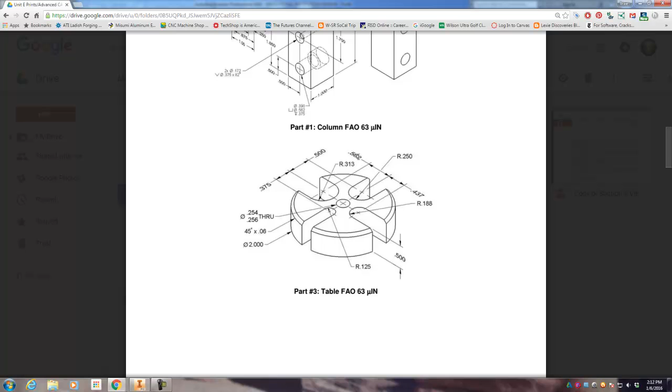So there's just a lot of dimensions. You got to really pay attention to where these lines go back to. So it's 0.375 from this line to the center of this, and then from this line to the center of this. So it's an idea of making sure that you take a minute and you look through all your dimensions as you're carrying that out to make things a little bit easier for yourself. So let's get after it here.

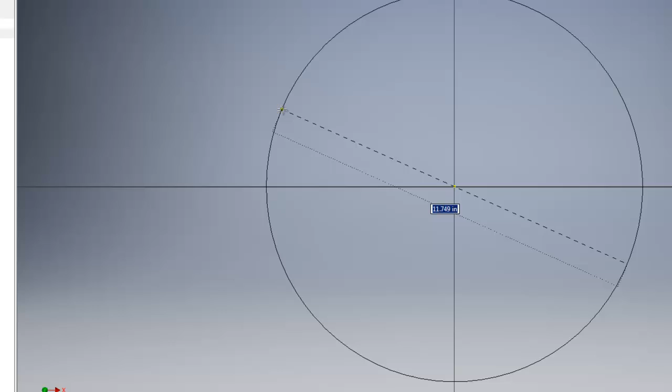So we create our new part. We start our 2D sketch, and if you look at that other piece, you can see that we'll create that on the top plane as well, like we were doing with the last one. We'll rotate that around so we can read the top, make sure life goes easy here. So we're gonna click on circle, start it from the origin, and it looks like the overall diameter of this whole piece, it says it's got a diameter symbol of 2.000. So it's a 2-inch diameter arbor press.

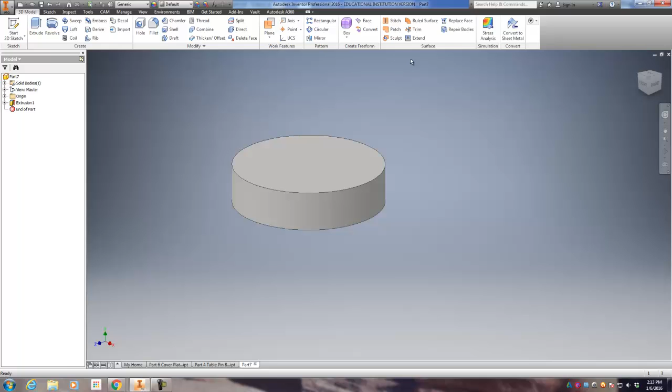So we'll take that, and we're just going to start by extruding that piece, and the thickness of the arbor press appears to be 0.5 on the print. So we'll go ahead and make that piece. We're good there. And now we'll click on this top face, and we'll create a new sketch, and this is where we're going to put all of our, again, I'm just going to rotate it because I like to, so I can read top.

But now we're going to have to put those different size slots in all of these places right here. I'm going to do it similar to that last one where I made a circle and I went from there. So let's go ahead and make a circle. Let's start with the smallest one first, which is down here. So we're going to just randomly kind of place a circle in here. The diameter, oh again, this gives me a radius, doesn't it? So if you remember, because the radius is 0.125, 0.125 times 2, it's a 1/4 inch diameter.

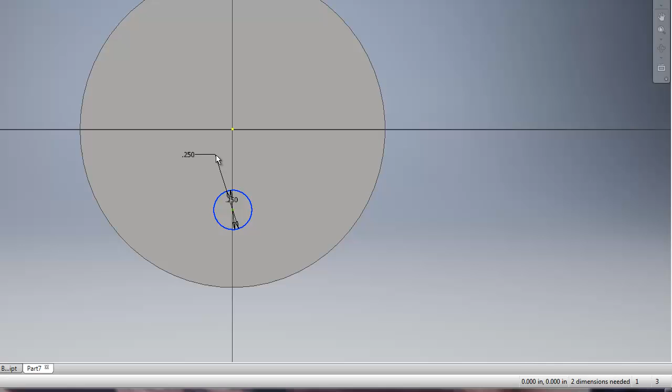Again, the next thing I need to do is place a dimension so it lines up in the correct distance. And all of our dimensions, again, are coming from the center of the part. So that's why I started on the origin right there. Now, it's kind of giving me a hard time grabbing that. So I'm going to hit escape on the keyboard, and I'm going to do that project geometry, so that can project that circle, which will also project the center of that.

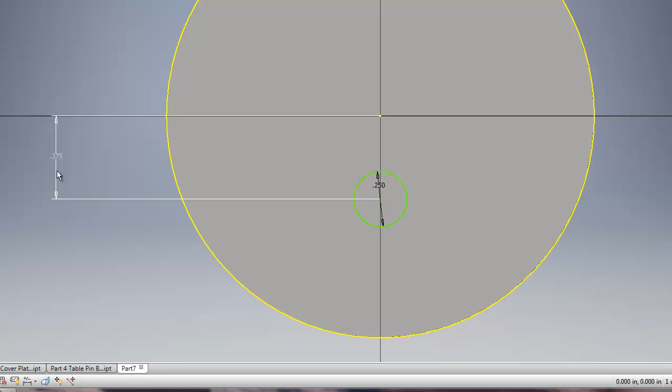So dimension, circle, maybe. Oh, there we go. I guess it was there. It just wasn't being my friend. 0.375. There's that. Okay, so that's my distance away. The center lines indicate that everything is all centered on 4 separate quadrants. So that's actually the distance away that I need. So from there, I can go ahead and just create a line. If you remember how I did that, I snapped it over that tangent line.

Oh, I love it when the day is over, huh, guys? Let's just keep working, you know what I'm saying?

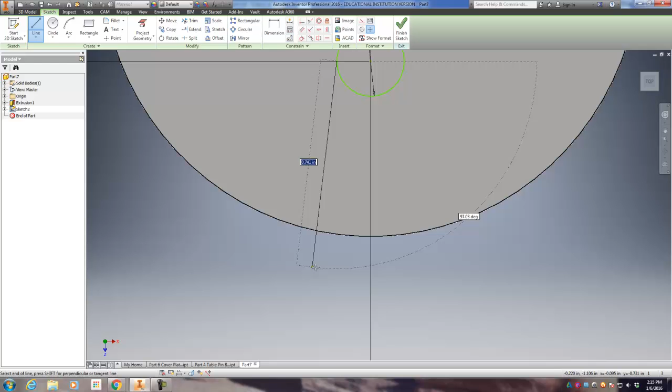All right, so we bring this thing over, and again, it's kind of hard to pick how it's going to be vertical. So I'm just going to place it, hit OK. I'm going to do the same thing, and I did it at an angle. So my important part is that I do get my little yellow dot there, but I realize these are completely not vertical.

But I can just click the line and remember this vertical constraint. I can put that, and that perfectly makes it vertical. Same thing over here. So now I got this bad boy, so things are set up where they're supposed to be set up. Okay, so these are vertical lines coming across the edges.

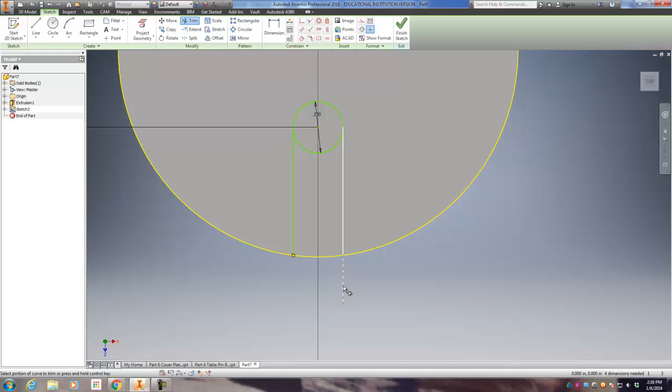Life is good. From here, I made these a little too long. How do we get rid of that? Trim. So I can trim this, and I can trim this, and actually I can go ahead and trim the inside of that out, because that's going to be my cut right there. Okay, let's do that 3 more times basically. So we'll come over here and we'll look at this next one.

Let's go ahead and make ourselves a circle. In this case, it is 0.188 times 2. So now I got that guy. Next up is dimensioning the distance from the center. This is giving me a number of 437. And now I can go ahead and make my lines. Those actually came out easy. I didn't have to do the little thing that we were doing before. X command, remember, is the hotkey for trim.

Alright, looking easy, huh? Another circle. Next biggest one's here. Pop that thing in there. Looks like this guy is 0.25 for a radius, so multiply that by 2. That's a 1/2 inch diameter. Now we need to dimension it. Circle to the center. That shows me it's 0.5. Again, we'll make our lines.

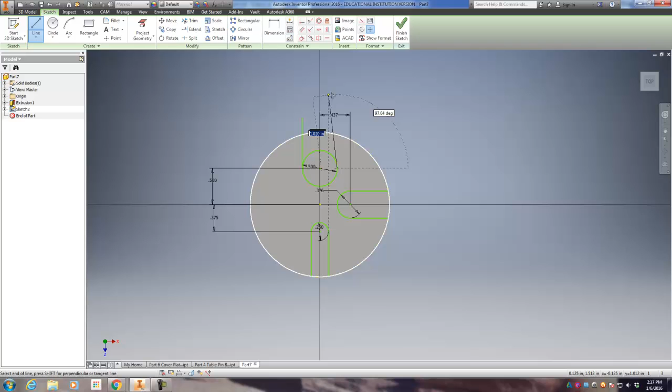Now that one showed the constraint. If you look at it, it's kind of cool. See how it kind of popped that up there like that? Boom. Boom. Cool. So now I don't even have to do that. I can just go to trim, get rid of that, and that, and that. One left.

This bad boy is 0.313 times 2. Maybe. There we go. We need to dimension it from the center. What do I got? 0.562 is what I got. Let's make some lines. Line. Dragging that out. Click, right click, OK. Trim. Bam, bam, bam. Check that out. We got it.

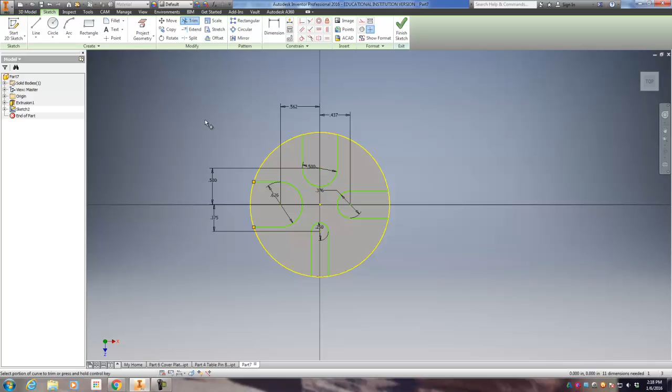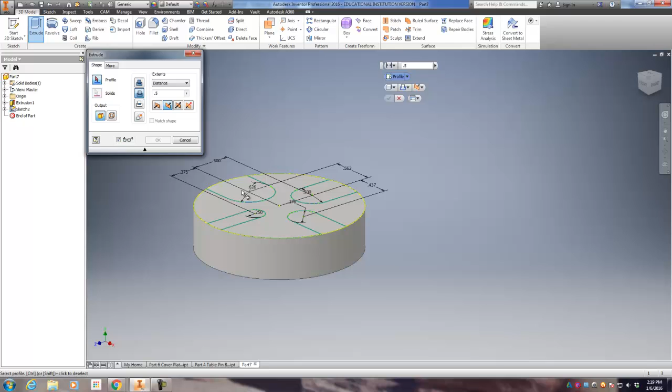So we do finish sketch. And now I want to cut through those 4 places. So I go to extrude again, but instead of this adding, or we call it join, we go one below, and that'll be called cut. Click cut, come over, we're going to click this, this, this, and this. How far do we want to cut? We can click distance, or we can go all, because we're going to cut through the whole part. Hit OK. All right. Love it.

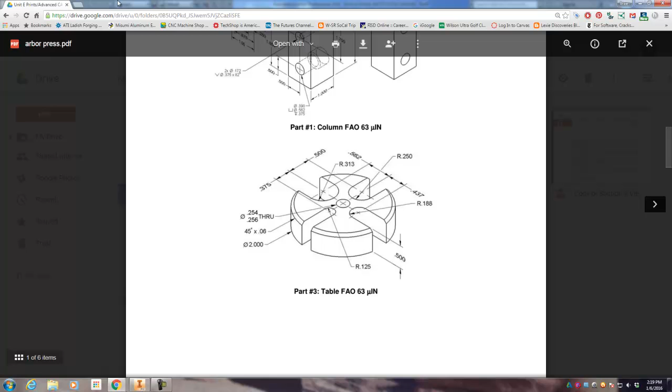Next, let's put that hole through the very center of this part right here. Diameter 254, 256. We're going to go with the bigger number there, because a pin has to go through that. So we start a new sketch on this face. Put yourself a point in the origin. Boom. Finish sketch.

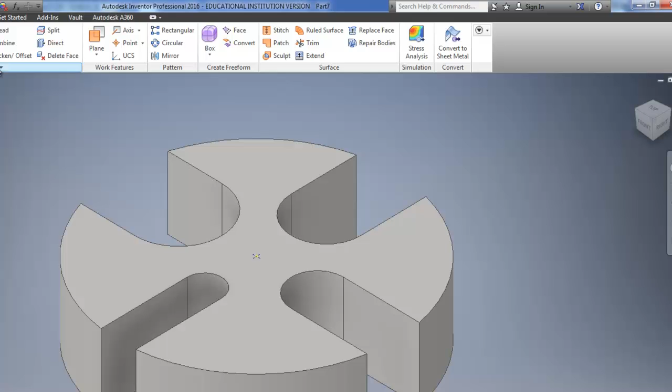I'm going to flip myself to a little isometric view here. And then you're going to come over to the hole feature. See how it defaults? This is actually a normal hole that goes all the way through at a diameter of the bigger number, 0.256.

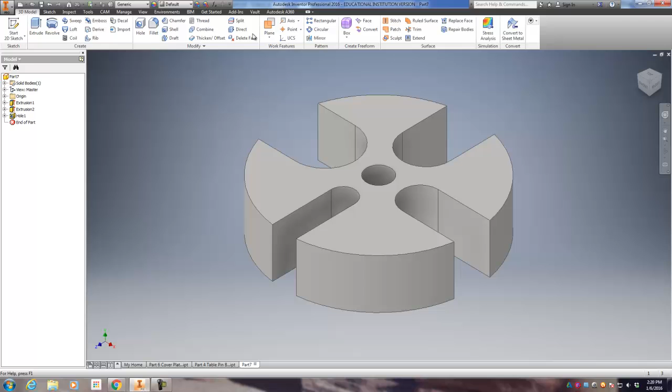Okay. So it looks like now we just have to put the chamfer around all those edges. It's just the outside edges. It doesn't chamfer in here. So I'll go chamfer. Click my edge. Click my edge. Click my edge. Click my edge. Number is 0.125 right now, but on the print it is calling for 0.06 again. And then hit accept. So we have our chamfer, we have our holes, we have our slots. Life is good. What do we got left to do?

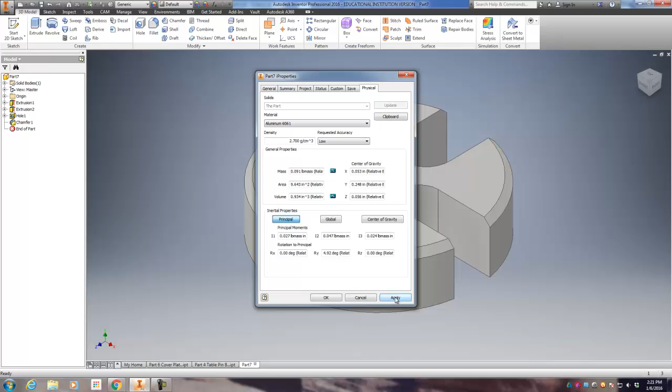iProperties. Physical. Again, I'm going to double check my blueprint to make sure that part number 3 table is aluminum 6061, and it is. 6061, my bad. And hit apply. Hit close, and now it's aluminum, and we can save that part. This is part number... I'm at a loss here. I gotta go back to my blueprint. Part number 3, the table.

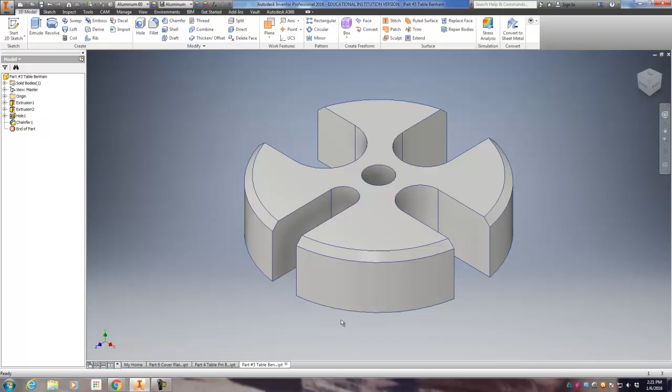Save. Alright, again, a lot of repeated commands, using some sketch tools, using some fillets and holes, and we're just doing good work as we go through here. Good job.